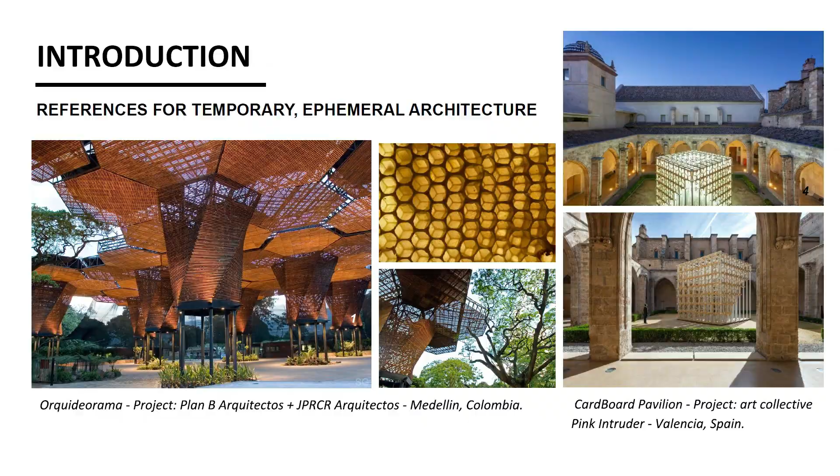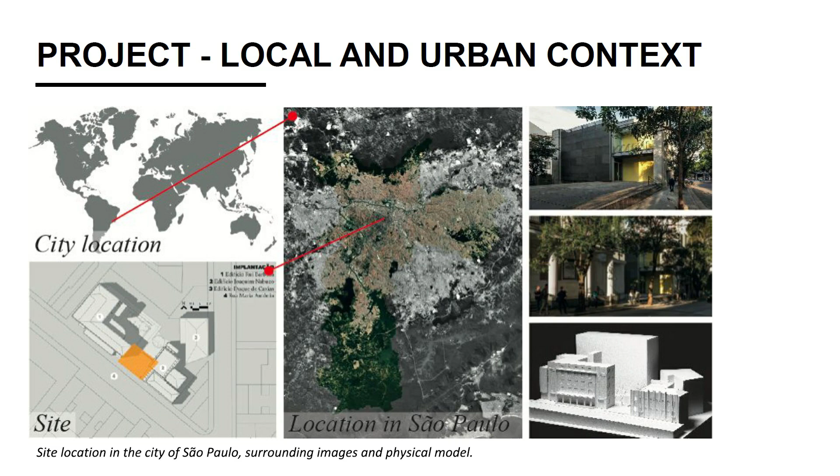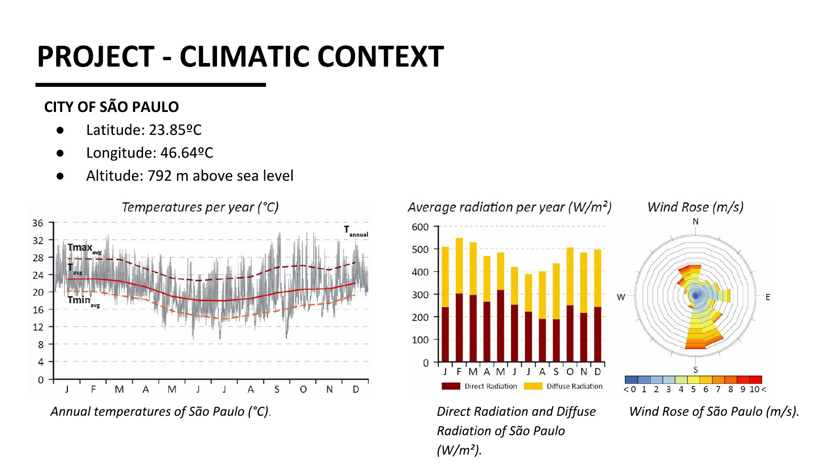Going on for the methodology, in order to settle the main conception of the project, it was taken into account the investigation of the microclimate conditions, user needs, and data collection. It was based on the measurements, recorded values of dry bulb air temperature, globe temperature, air movement, relative humidity, sound pressure level, and the questionnaires about environmental conditions of the space, ergonomic, thermal, and acoustic conditions, and also with the use of Grasshopper design software, which is a combination of geometric design and simulation tools.

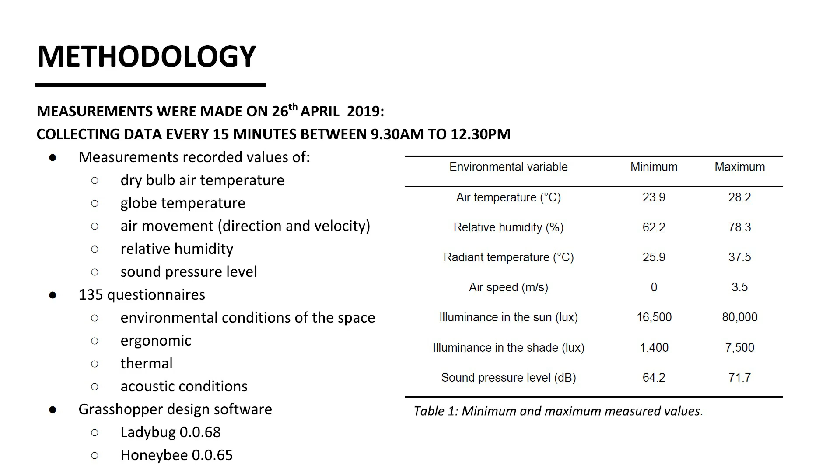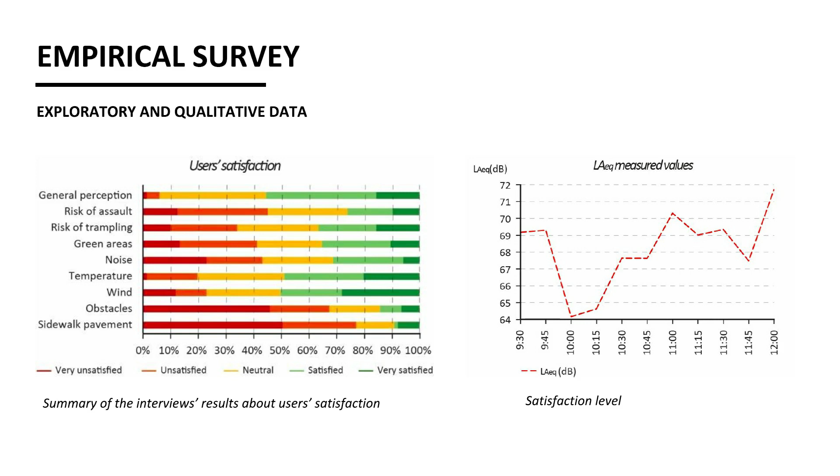Moving on to the design concept development, it was based on empirical analysis, as we already saw, and general understanding of the urban context and users' needs, which encompasses mobility, flexibility, replicability, dynamics, and the possibility of different uses for a public space designed for the permanence and passage of people.

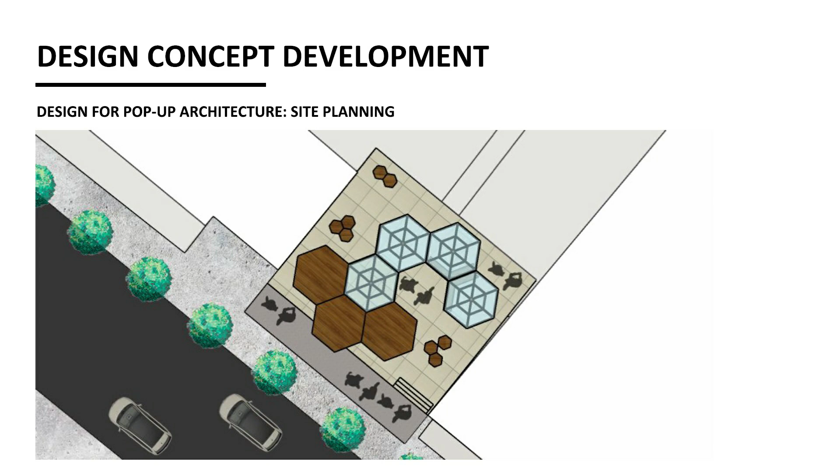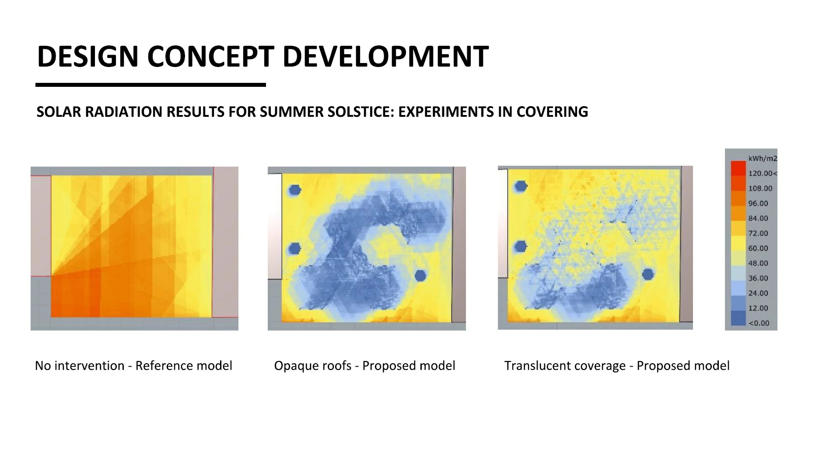Also, in the design concept development, solar radiation incidence analyses were important to define the type of roof material, where 4 hexagons were made of translucent honeycomb polycarbonate and 3 of them were made of glued laminated timber. Also, this kind of analysis was important to help us to build the structure on the site.

Also, the environmental concepts adopted for this design were important as a way to create more flexible, shaded places, which allow different types of uses, such as exhibitions, social events, outdoor library, recreation, and permanence. Also, acoustic panels were proposed for the hexagonal structures to work as sound barriers.

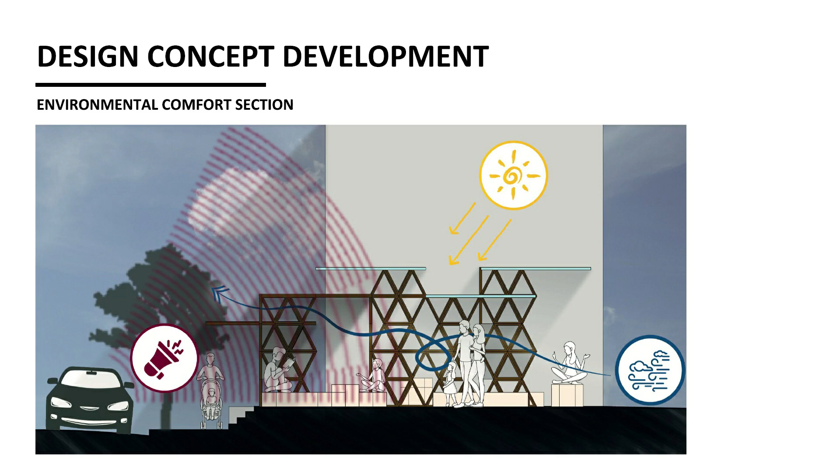Moving on, the project was simulated to evaluate the solar radiation, natural lighting, and comfort levels using 2 software extensions of the Grasshopper parametric modeling. 2 scenarios were simulated, one without the pop-up structure, called reference model, and another with the insertion of the pop-up structure, called proposed model. It was possible to analyze the impact of translucent coverage on the distribution of radiation and space lighting in the proposed model scenario.

The simulation result in the proposed scenario shows a large decrease in incident radiation under the translucent coverage. Here in this slide you can see some images of this kind of simulation.

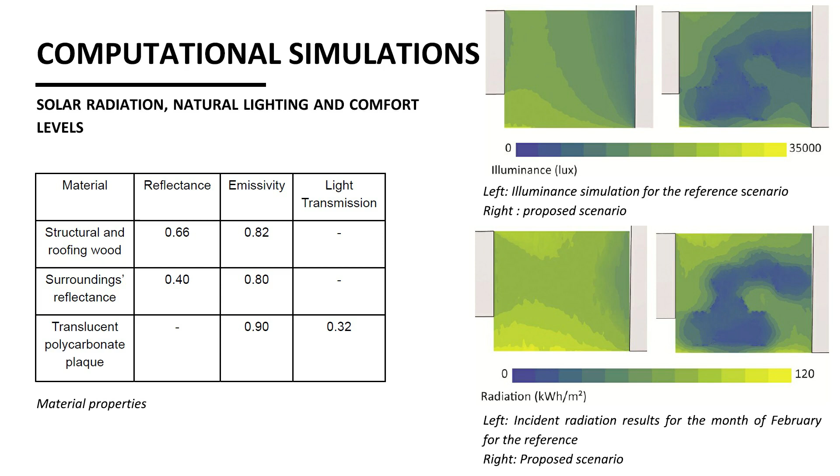Also, we would like to highlight the comfort index. The physiological equivalent temperatures, PET, were calculated for two cases. One with a seated person with a metabolism rate equal to 1.0 MET, and another case in which the user is walking through the coverage, an activity that has a metabolism rate of 2.6 MET, as you can see in the graph.

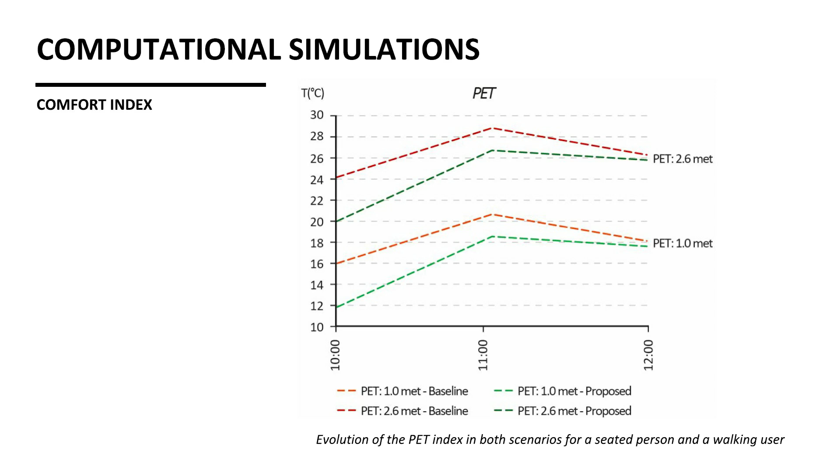And finally, to conclude, a temporary structure was developed with conditions to be reassembled in other locations with a lack of spaces for permanence and social living in São Paulo and in other places with different climate contexts. Also, the project developed in this work is a prototype, therefore it is still necessary that more tests with other modular changes are carried out in different places and climates.

This research highlights the importance of developing an innovative design for temporary structures adapted to an urban context, considering the environmental comfort concepts together with technological design tools.